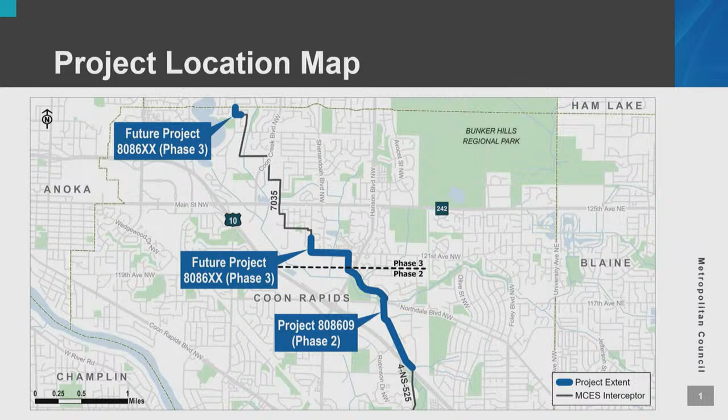They did a great job and they had great questions. It was very, very well attended and probably one of our more positively attended public hearings that we've had for a while. So I think it was a great use of our time and their time as well. A little bit of background on the project itself. We're located again in the city of Coon Rapids, just to the north of Highway 10, also north of our Phase 1 project that we've completed this past year.

The improvements required: a condition assessment of this interceptor determined that the project was needed based on overall poor condition of the existing 48-inch RCP pipe, originally constructed in the 1968 and 72 timeframe. Condition assessments were performed on these pipes in 2018 and 2021 and found the assets to be in poor condition. 3 types of improvements were proposed or evaluated as part of the project. These included cleaning the existing interceptor, rehabilitation through trenchless methods, and replacement or rehabilitation of the existing structures.

Excuse me, let me rephrase that. 3 types of improvements are proposed for this project, which include cleaning the existing interceptor, rehabilitation through trenchless methods, and replacement or rehabilitation of the existing structures. That was determined to be the most cost-effective, most reasonable method of moving forward with rehabilitation of this line.

Our next steps, just kind of a summary of what we've done previously. So back on September 25th, authorization was granted to hold our public hearing. We held our public hearing at the city of Coon Rapids, not the city of Forest Lake. Again, thank you for everyone's participation in that public hearing. Today, we are before the Environment Committee to consider comments and recommend approval to adopt the facility plan.

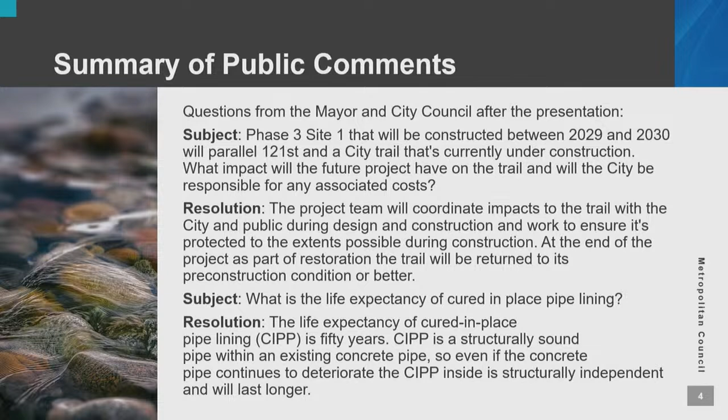We also talked about some of the construction methods, confirmed that there would be no trenching unless something was necessary. We talked a little bit about the construction of temporary conveyance across trails and roadways, how oftentimes that does require some temporary trenching across those facilities so that we can do some short-term closures in order to install our temporary conveyance. We were asked about how funding would be addressed for this project.

With that, we did confirm with our finance group that there's a $242 annual average cost for the wholesale rate that Environmental Services charges to communities, and 55 cents of that $242 is identified as paying for this project. We really reiterated that it's a regional project, a regional benefit that we're advancing. So it's not just Coon Rapids that is paying for this work, but we as a region are really advancing that work. No other comments or questions were received from the public prior to or during the public hearing.

With that, our proposed action is that the Metropolitan Council adopt the facility plan for the Coon Rapids Interceptor Rehabilitation Project, project number 808609, per the attached resolution number 2025-1. With that, I'm available for questions. Questions? Yeah, please, council member. Yeah, I just had a question about the pipe. When they use the cured-in-place pipe method, what's the lifespan of that pipe once they put it in there?

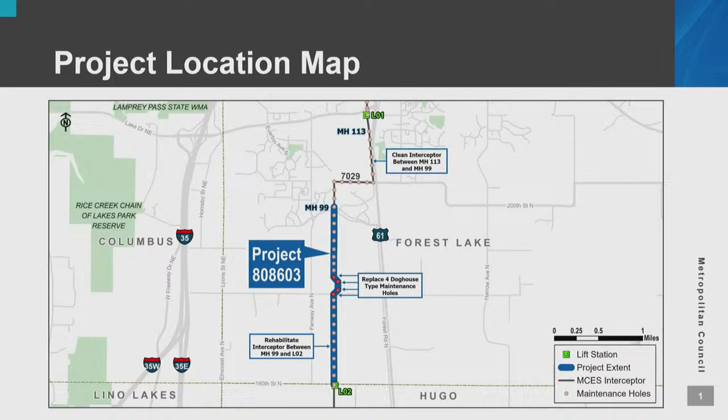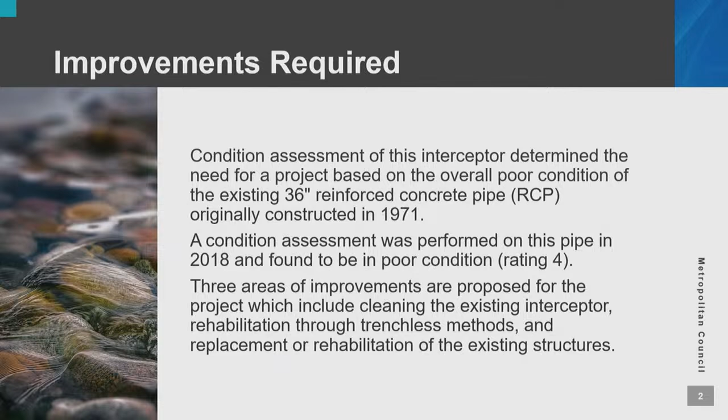So the improvements required on this pipe: it is an existing 36-inch concrete pipe constructed in 1971. A condition assessment performed in 2018 found that the pipe was in poor condition. And as noted, there's 3 areas of improvements proposed, which include cleaning of the existing interceptor, rehabilitation via trenchless methods, and replacement and rehabilitation of the existing structures.

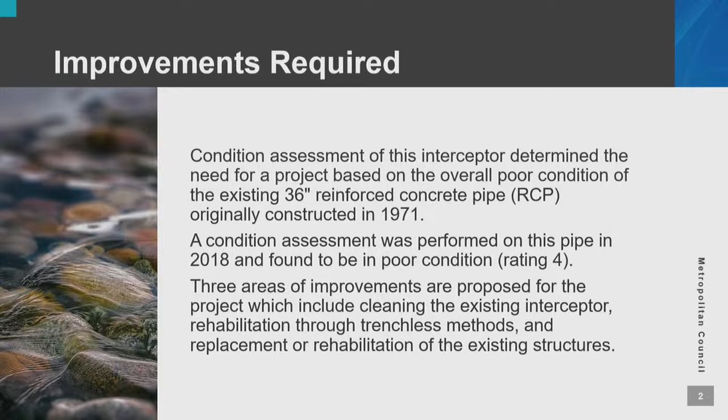So the next steps, again, summary of the facility plan public hearing process to date. Back in late September, we came to the Environment Committee and the Council to get authorization to hold a public hearing. On November 18th, we had the public hearing at the City of Forest Lake.

And I'd like to take this time to thank you, Chair Lindstrom, for leading the proceedings at that. You guys have been sending me all across the region lately. Yes. So much appreciated.

And we're here today in front of the Environment Committee to consider comments and recommend approval to adopt by the Metropolitan Council. That meeting will follow up on January 22nd. And again, prior to March 7th, if adopted, we would submit the final facility plan both to the Public Facilities Authority and the MPCA for inclusion in the intended use plan.

So, summary of public comments. We had one official comment received from a local resident near the project. Their concern was of construction noise and work that potentially would be performed after hours. And our response was that we noted the construction will take place during the hours as stated in the City of Hugo and Forest Lake ordinances.

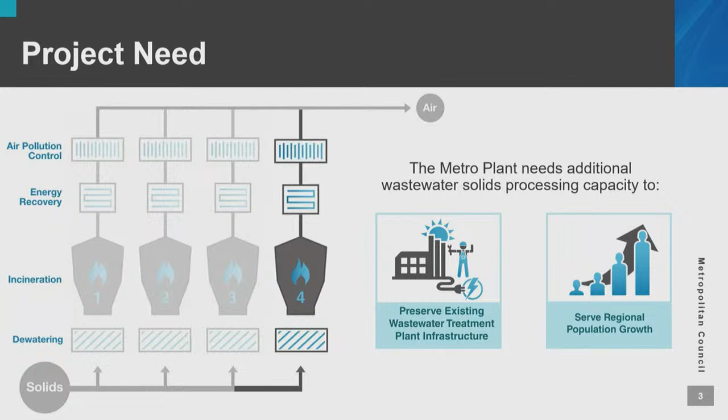The Metro Plant Solids Management Improvements Facility Plan, which recommends a 4th incinerator at the Metro Plant, was adopted by the Council on October 10th, 2018. The Council received a findings of fact, conclusions of law, and order for a negative declaration on the need for an environmental impact statement for the Metro Plant 4th incinerator project from the Minnesota Pollution Control Agency, or MPCA, in October 2023. The Council received an updated air permit amendment for the Metro plant from the MPCA in January of 2024.

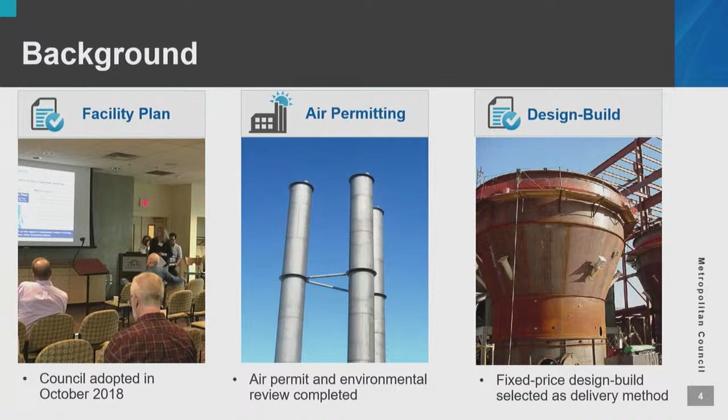The Metro Plant 4th incinerator project will be constructed using a fixed-price design-build approach, where the design builder retains performance responsibility for process performance to ensure the system meets emissions limits. Staff took a new and strategic three-step procurement approach for the fourth incinerator project. First, the incinerator system supplier, which will furnish the incinerator equipment in the design-build contract, was selected. The ISS provided design-build proposal support as well. Veolia Water Technologies and Solutions was selected as the ISS.

The second step was to shortlist up to 3 design-build teams to submit design-build proposals. 2 design-build teams were shortlisted: Jacobs Rice Lake, a joint venture, and McGough Construction. The third step is the action before the Environment Committee today, which is to select 1 design builder to design and build the Metro Plant 4th Incinerator project. And with that, I'll turn it over to Stephen to talk about the project scope.

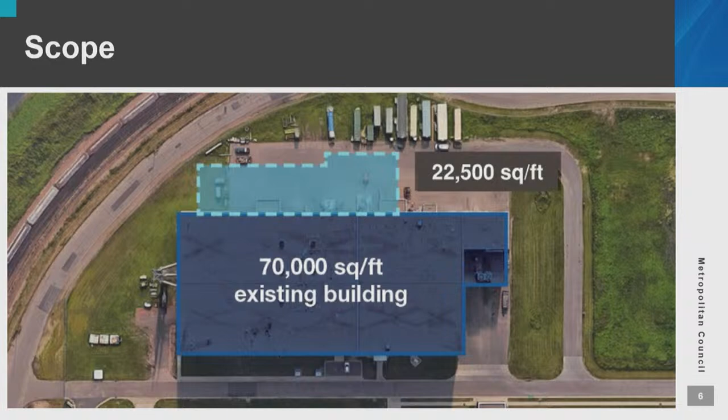Thanks, Rene. The Metro 4th Incinerator project will install a parallel incinerator train and dewatering equipment in an approximately 22,500 square foot expansion to the existing solids management building. Because we've been operating and maintaining our existing 3 incinerators for 20 years, we plan on making some improvements. A couple of these improvements include a horizontal waste heat boiler and improved materials of construction in certain pieces of equipment.

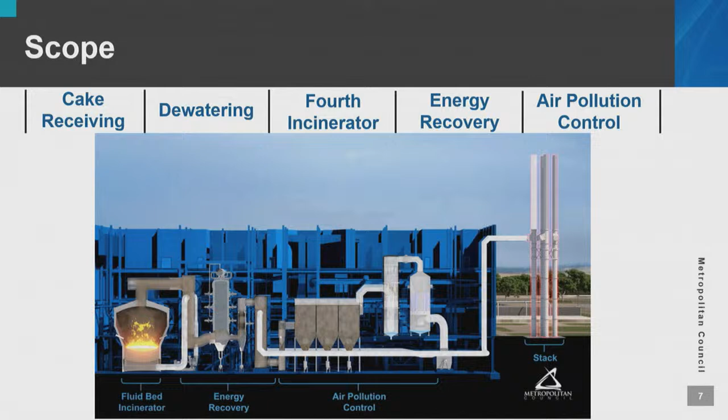The design build RFP was issued to the 2 shortlisted design build teams on January 25th, 2024. A pre-proposal meeting was hosted by council staff on February 29th, 2024 that outlined the solicitation requirements, discussed project specifications, and responded to plan holder inquiries. The Office of Equity and Equal Opportunity, OEEO, assigned a Metropolitan Council underutilized business goal of 9% for this solicitation. OEEO determined that the firm being recommended for award has met the MCUB requirements of this contract. 2 proposals were received on August 23rd, 2024, one from Jacobs Rice Lake, a joint venture, and one from McGough Construction.

An evaluation panel used the following criteria to evaluate the 2 proposals: the price of the proposal, the project technical approach, the project delivery approach, and the quality of the proposal. The evaluation panel reached consensus that the proposal submitted by McGough Construction is the most advantageous to the council. Therefore, the proposed action is that the Metropolitan Council authorize the regional administrator to negotiate and execute contract 21P055 with McGough Construction for the Metro Plant 4th Incinerator Design Build Project in an amount not to exceed $258,732,297. That concludes our presentation. Are there any questions?

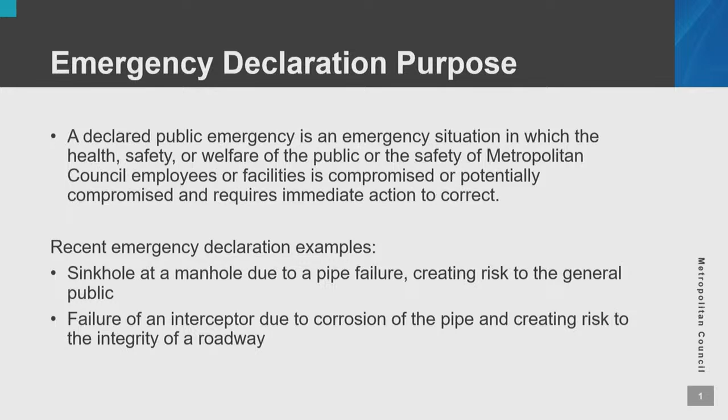A reminder of our emergency declaration process: the infrastructure concern is identified and investigated. A determination is made that carrying out the competitive bidding process prescribed by the council's procurement policy would unacceptably delay the commencement of work to repair the facility. An emergency declaration document is prepared and signed by the General Manager of Environmental Services.

After review, the emergency declaration is authorized by the Regional Administrator, who has delegated authority pursuant to the Council's procurement policy. The contractor is selected and work begins under the direction of a Council's authorized representative, and the emergency declaration is ratified by the Metropolitan Council if the cost to correct the emergency exceeds $175,000.

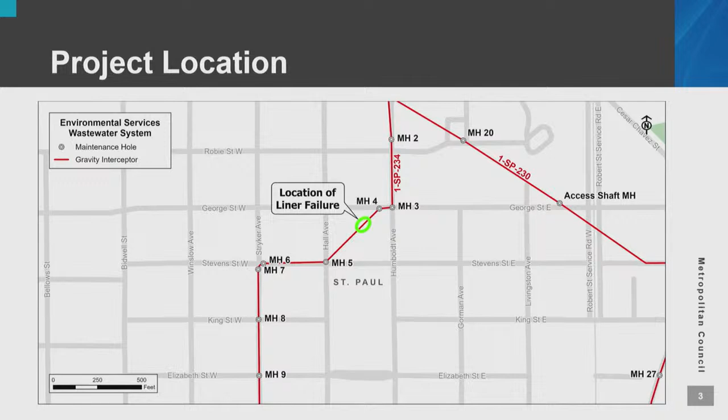Our emergency project is located in St. Paul, around the intersection of George Street and Humboldt Avenue, just south of the Mississippi River and west of Robert Street. It's also a little bit north of Humboldt High School in St. Paul. We circled the impacted area in green on this map. So 1SP-234 was built in about 1897. It's composed of a brick-lined sandstone tunnel.

December 23rd, our staff were investigating the location as a part of an upcoming project and discovered the failure of the liner itself. Since the preparation of our business item and the PowerPoint, we've done some further investigation of this area. We've determined that there is a sanitary service lateral that comes into the facility at this location. We're missing a portion of pipe of that sanitary service lateral, and the water flowing through was able to wear through the brick liner in that location and cause it to collapse.

The scope of the repair: we need to get in and shore up that tunnel to make sure that that liner doesn't collapse any more than it already has. If that liner continues to collapse, it can cause backups in that area and cause further damage in that region. We also have some concerns about further erosion of the soil above that liner in that sandstone area. It seems that the area is stable for now, but we want to move forward as quickly as we possibly can to maintain integrity of that sandstone area where the tunnel is constructed.

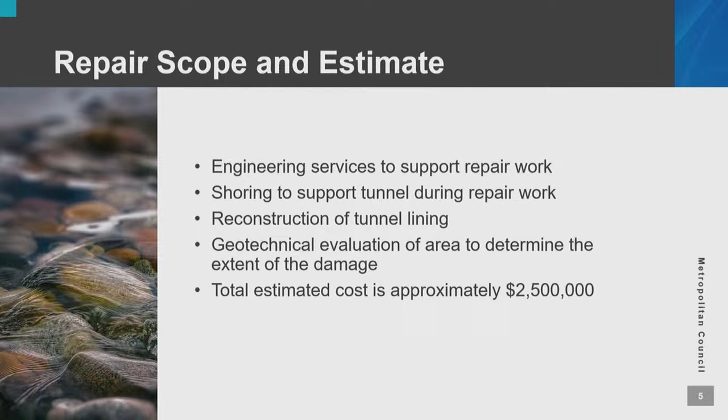With that, our proposed action is that the Metropolitan Council ratify the emergency declaration for repairs of the brick liner for Interceptor 1SP-234 between George Street and Stevens Street in St. Paul in an amount not to exceed $2,500,000.

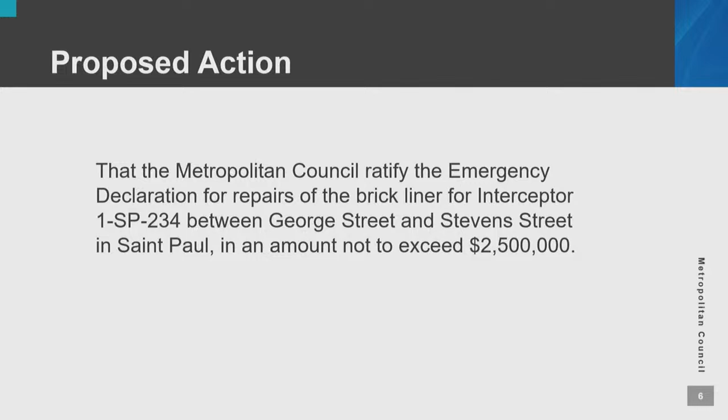Did you say this? I might have missed it. How deep is this? Thank you, Mr. Chair and council members. Roughly the pipe is around 35 to 40 feet deep in this area. Yeah. That makes things more challenging. Mr. Chair, it most certainly does. We're very limited in how we can access the pipe, and we need to make sure that we're accessing through one of the maintenance holes that are at that location.

Because of the depth, they need to use a crane and a basket in order to lower people down into that location. The basket can hold one person, so it's very time intensive to gain access. Getting materials to that location is a bit of a challenge because it's around 100 or so feet walk up to where that failure is located, and so you're carrying those materials to that location. It's certainly a challenge to work through, but I think we've got a good team identified for advancing that work.

And do they pipe in oxygen and do they have monitors to make sure that they're not passing out down there and that it's all as safe as possible? Safety is a very, very important part of this work. We do have ventilation systems that we're installing as a part of that work to make sure that we've got adequate airflow for worker access in that location.

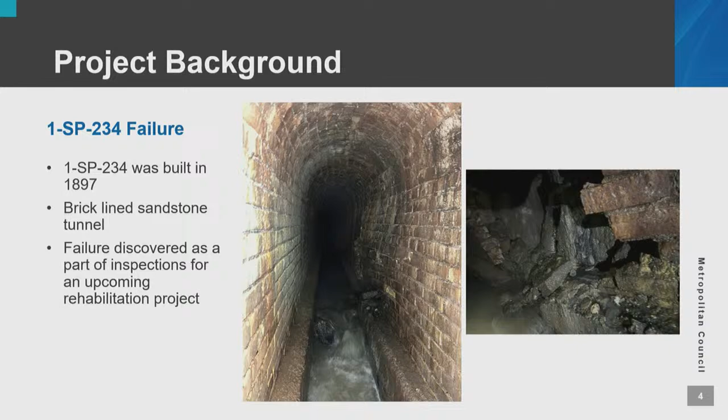Other questions? Is there a motion? Move approval. Second. Motion has been made and seconded. All in favor say aye. Aye. Opposed say nay. Carries. Thank you very much. That takes us to our general manager's report.

Thank you. A little bit about 2025. We're off into the new year, and we've got two meetings this month. The next one is particularly important because it's the water policy plan that you've been receiving communication on. So hopefully you can all get here. We only do this every 10 years, so don't miss your opportunity to be a part of making that history. We think this is a special one, so we're really looking forward to putting that into action.

The schedule we have is a draft of what we know of, but this is likely to change. We'll also give you a link to an online version so you can look at that from time to time to keep abreast of what's coming, but this is how it stands today. Heavy in the first part of the year, and then lighter in the latter part of the year. It's going to be another great year. Exciting projects.